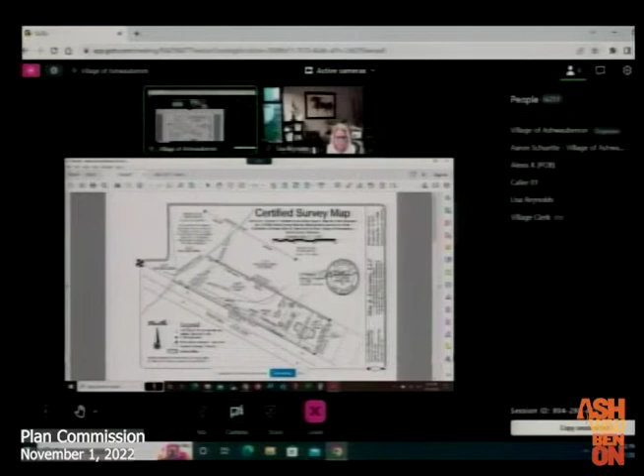I'm just going to sign on here so I can bring up the CSM. All right, so there's the CSM. Currently, it is one large lot that extends all the way to Dutchman's Creek. It is currently zoned R1, single-family residential. It is a legal, non-conforming lot in the R1 zoning district.

It is actually a condominium form of ownership currently, so it is a duplex, but it is owner-occupied through condominium. The request is to split the duplex down the common wall in order to facilitate financing to purchase one of the sides of the duplex. The financing agency does require ownership of the structure and the land, which necessitates the CSM to split the home down the common wall. The condo or the duplex does have a firewall extending from the basement floor up to the roof deck as required for a 0 lot line subdivision.

In this case, the proposal does meet all dimensional standards of the R1 for the legal nonconforming lot or parcel. The recommended conditions of staff approval include Ashwaubenon certification should be revised to name Chris Teskey as Ashwaubenon village clerk, payment of all outstanding water and sewer bills, and then approval by the Brown County Planning Commission. If you have any questions, I'd be happy to answer them. Otherwise, Mike Androshko of Mau & Associates, representing the applicant, is available, and the applicant, Lisa Reynolds, is also available online.

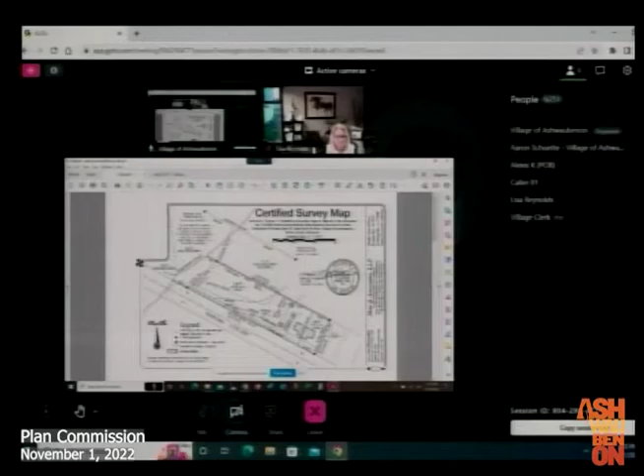You know, Aaron, I can't understand why this is even coming in front of us, knowing some of the people that were living there. They were privately owned, especially for one of our residents, and I've known them personally. You know, wasn't this taken care of when that was built, to have a common wall, and then this guy owned just half of it?

So, right, it is currently owned under a condominium form of ownership. So what they do is they own their own unit, so each owner owns one side of the duplex. The problem with the condominium form of ownership for this financing agency is they don't also own their own portion of the land. So for a lot of different federal agencies that back some loans, such as the VA or FHA, they do require that the home and the land are financed together and separately from any other units. So currently in our condo form of ownership, the land is owned in common with both units.

So this clarifies that and splits that down the common wall. There's a physical separation and creating a new parcel line between the units. The common wall, yeah, correct, which is a masonry wall. So that includes the land. Correct, in other words, he's buying half of that along with the land, which, like you said, if it was an association, the land is common. Yep, that's right. All right, I just couldn't understand this because I've known a fella in there for years. He was on the other side of this parcel here. All right, I guess I understand it now, more or less, for financial purposes.

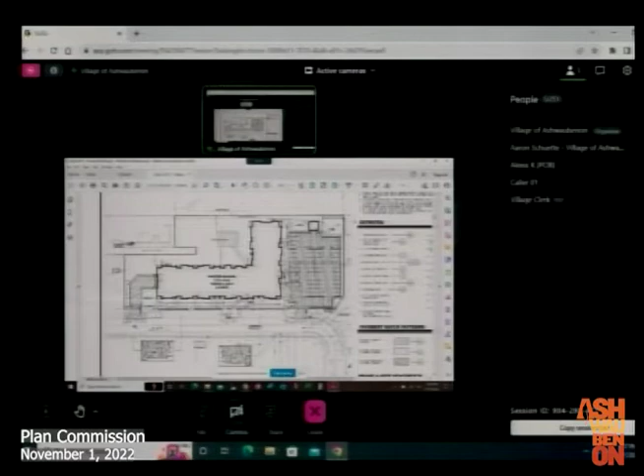The requested site plan review went to the site plan review committee earlier this afternoon. Because it is within the Village Center zoning district under our municipal code, it is required to go to Plan Commission and Village Board for review and approval as well.

In this case, the requested site plan is for Element Apartments, building number 4. This will be the final apartment building for the Element apartment complex. The proposal is for a 4-story building with 92 units. As depicted on the site plan, there is an off-street parking lot to the east.

The drive-in underground parking is to the west, entering the west side of the building. Additional features include a grilling patio area with a walkway to the building, and there is a fenced dog run in the northeastern portion of the lot. The fencing will be a black vinyl-coated chain link fence.

There's a proposed utility garage for maintenance equipment necessary for the complex—lawnmowers, gasoline cans, snow removal equipment, and so forth. Immediately adjacent to that is a small snow storage area, which will be grassed in the warm months.

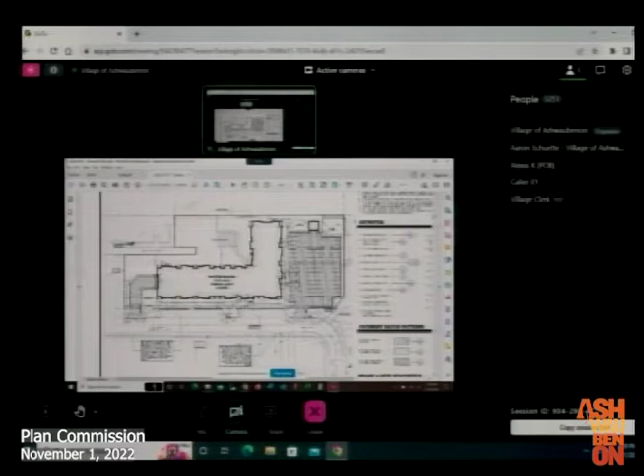Nine of the units fronting on Element Way will be walk-up units, similar to Element Buildings 1 and 2—a little different approach there. In terms of exterior materials, I'll scroll to that shortly.

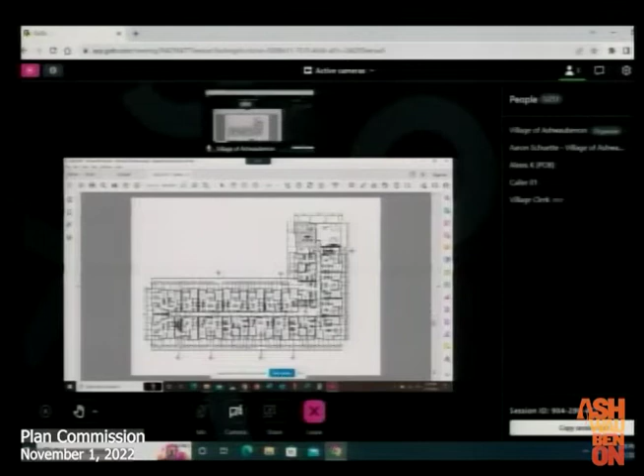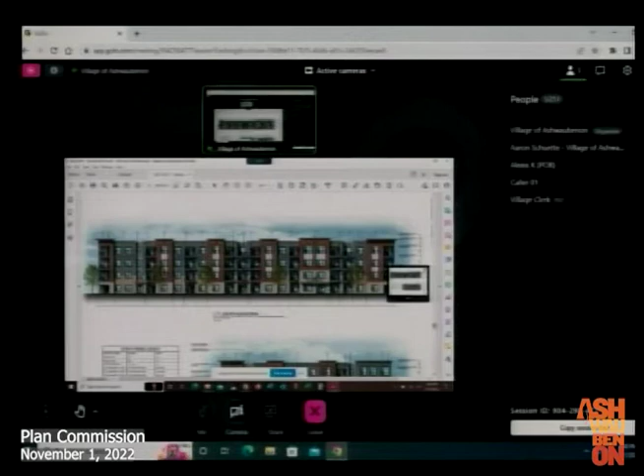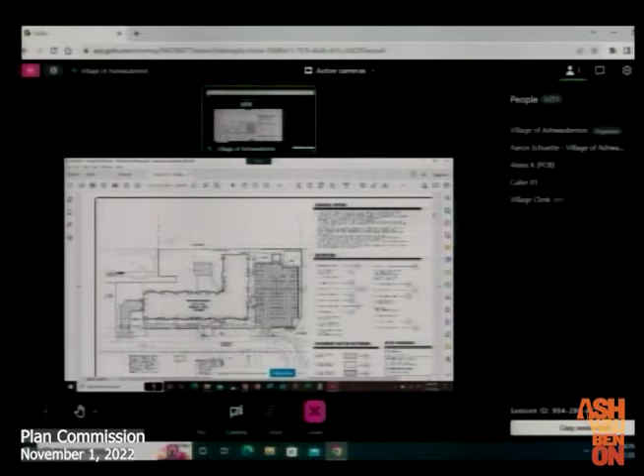One additional feature I should have pointed out in the site plan is the on-street angle parking that will be done as part of the Element Way reconstruction. In 2023, the east-west portion of Element Way will be reconstructed with all utilities and streets, and along with that will be on-street angled parking. This is in the street right-of-way, so it is public parking, but certainly the tenants of Building 4 will likely use them.

If you have any additional questions, let me touch on the conditions of approval. From zoning: meet all applicable sections of 17-2-200 Ashwaubenon Municipal Code. A couple notes from engineering: the village is not responsible for snow removal of on-street parking stalls, referring to those angled areas.

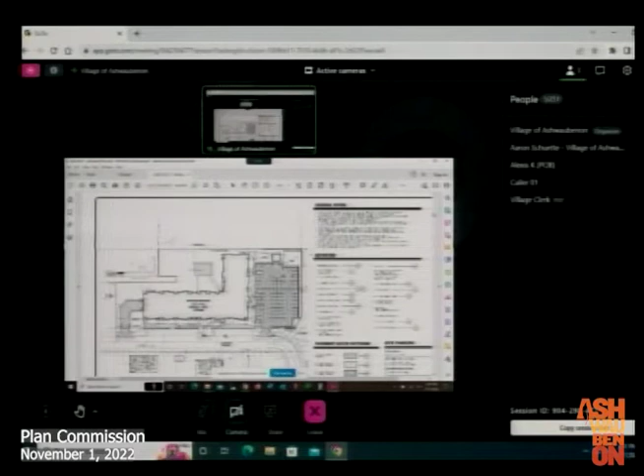Ayres Associates and the village will coordinate with Point of Beginning, the applicant's engineering firm, on the new Element Way road reconstruction project in 2023. From Village Engineering on stormwater: if desired, buy into the Ashland Regional Pond at $6,631 per impervious acre. If not, submit a stormwater management plan for the site.

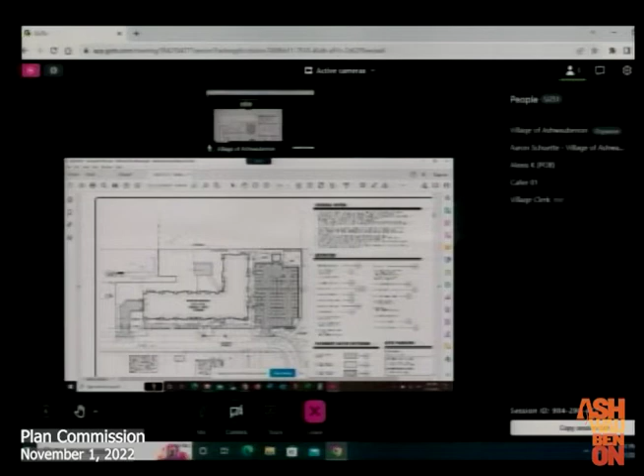From Public Safety: work with Ashwaubenon Public Safety as construction is progressing to determine Knox box location, and coordinate with them for acceptance testing of fire protection systems, including hydrants, fire alarms, sprinklers, etc. Forestry and Bike and Ped had no comments. If you have any questions for me, I'm happy to answer them. Otherwise, Jeff Slindy, representing the applicant, and Alexis, representing Point of Beginning Engineering, are available online.

Are they buying into the regional stormwater? More than likely, yes—they did for buildings 1, 2, and 3, so I would anticipate the same for building 4 to avoid the necessity of a local storm pond. It looks like it would be pretty tight for them to get anything in there. Correct.

A question I overlooked at site plan: I see the sides are vinyl siding on the garage—what's the front? The front is vinyl siding along with the garage door. Is that acceptable? It is under the approved PUD for this area. Vinyl siding?

It is an LP, I was thinking lap siding—it is an LP SmartSide. Okay, because that's facing right out towards the street. Right, yep, that is an LP SmartSide. We kicked it around at site plan; it's pretty much a duplicate of what you're seeing there right now. Good project.

Other than the garage that I overlooked, I learned a lot about dogs today. But anyway, I don't have any more questions. You're never too old to learn more.